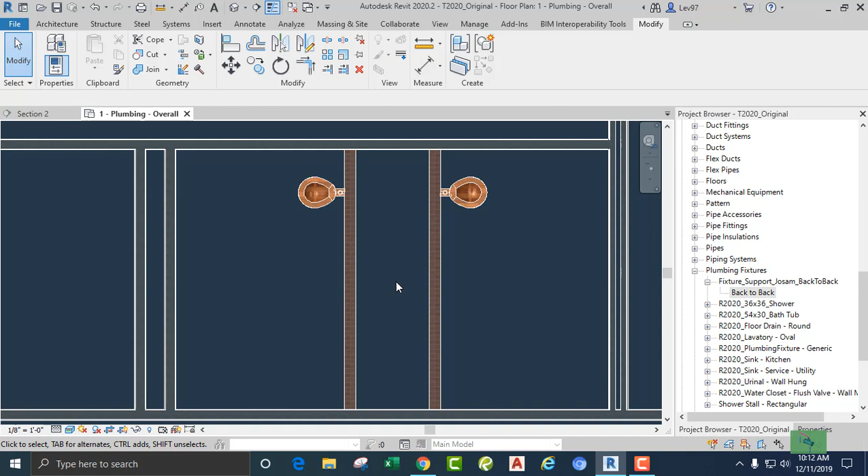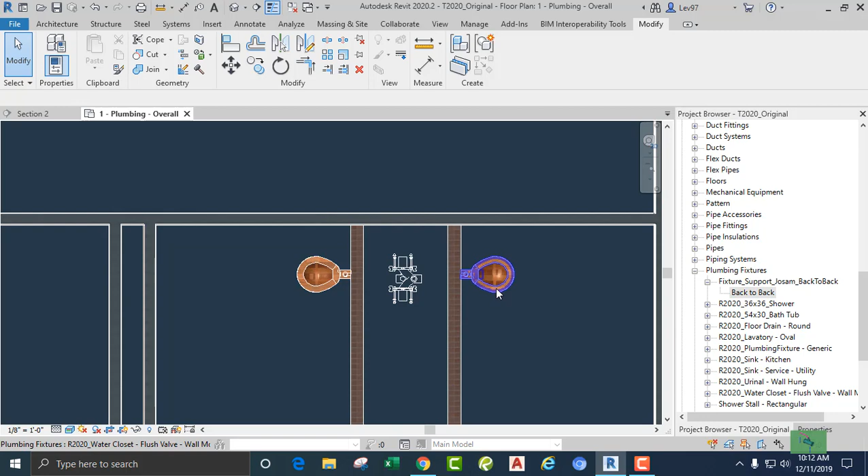Okay, let's talk about water closet carriers. I'm going to drag this water closet carrier over so that I can connect the carrier to these water closets. So I'm going to have a battery of back-to-back water closets.

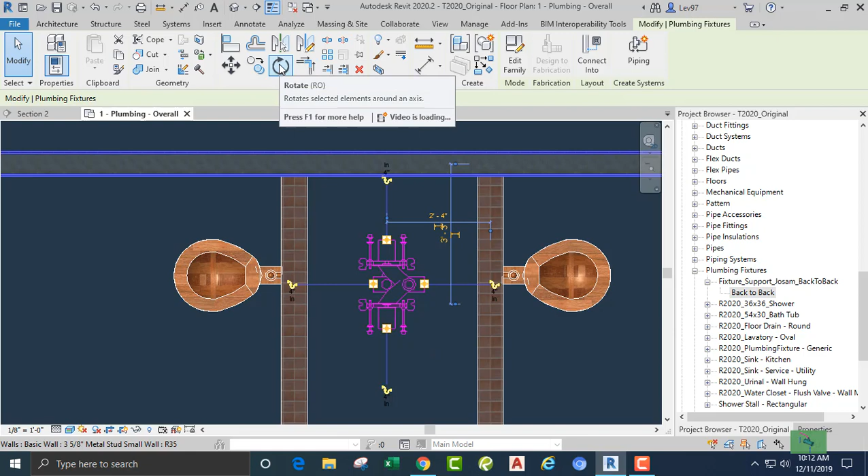After I get one or two in, I'm going to copy these others in. So what it looks like I need to do is rotate this. Okay, let's rotate the carrier clockwise. Let's go here, clockwise 90.

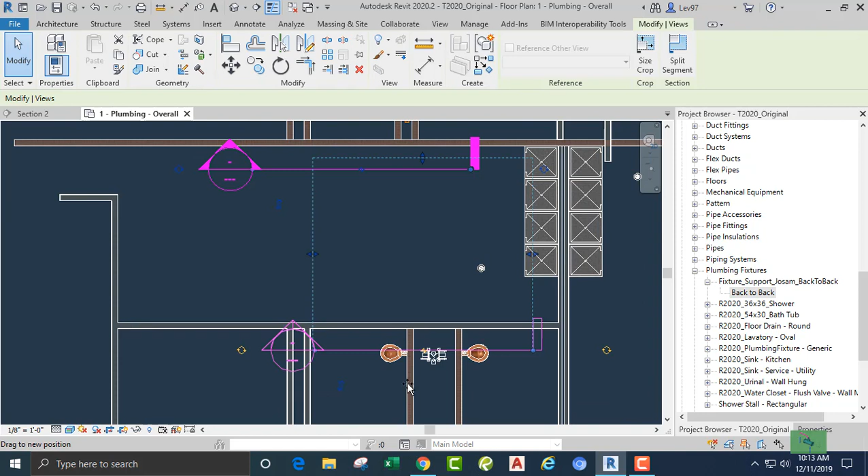Okay, see if we can get a section view in here. Let's put it about right there. Okay, and let's look at our section. Okay, and plan view, let's go back so that we can make our alignments.

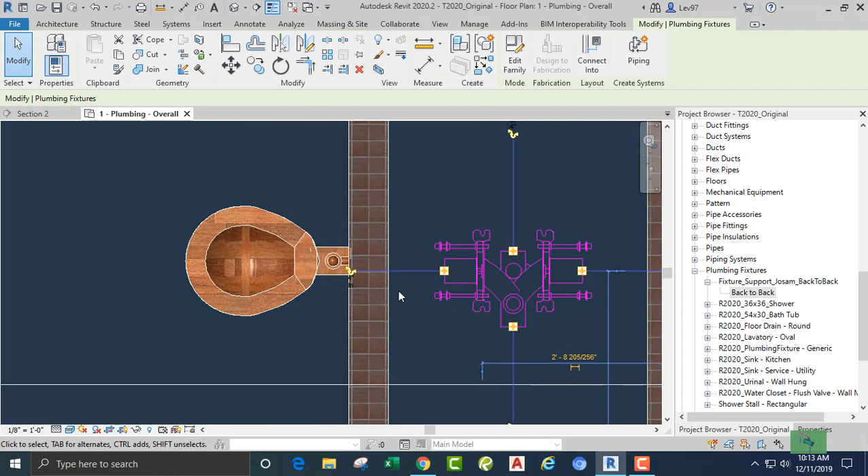I'm going to bring just a little piece out. Is that a 4-inch? Okay, that's a 4-inch. So we come out 4-inch. Okay, and let's try and get this other piece coming out.

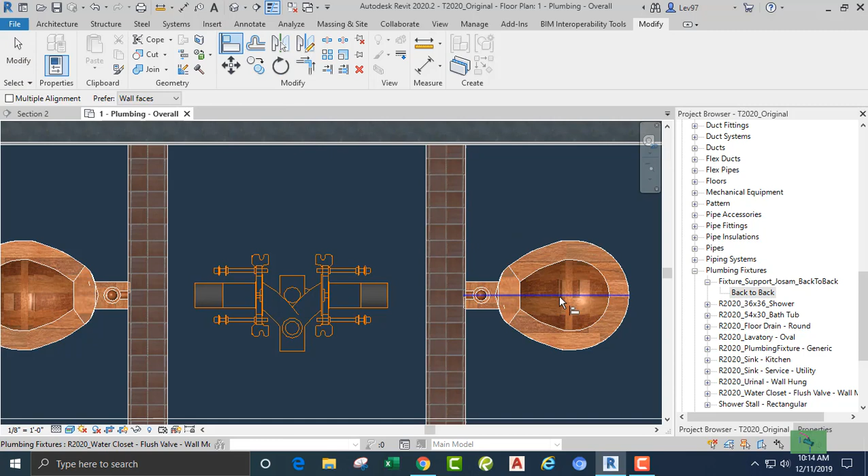Okay, so now I'm going to align. Because these two, it should be aligned. This one and this one, they should be the same. So it should be okay.

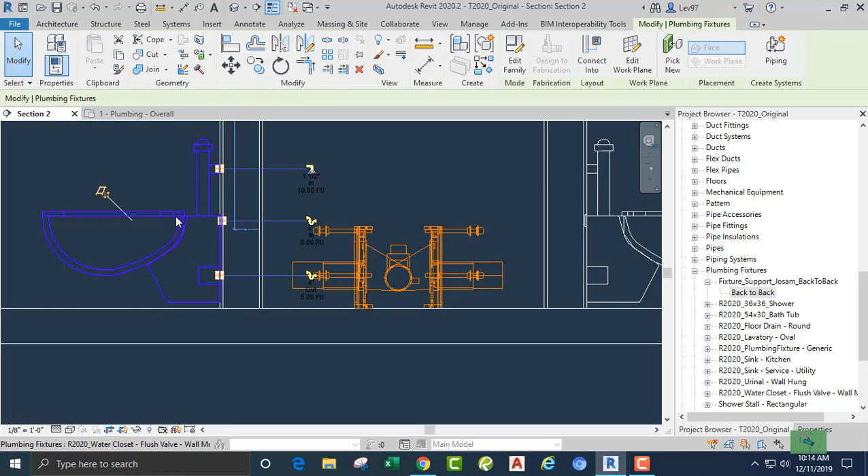Now let's go to the section view and align in the vertical. Let's align here and here. So it looks like it's okay. Where's my... wait a minute.

Okay, and let's bring a little piece out. And here, make sure that the slope is off. Sanitary. Okay, looks good, looks good. Looks like that's aligned. I'm going to put that right there.

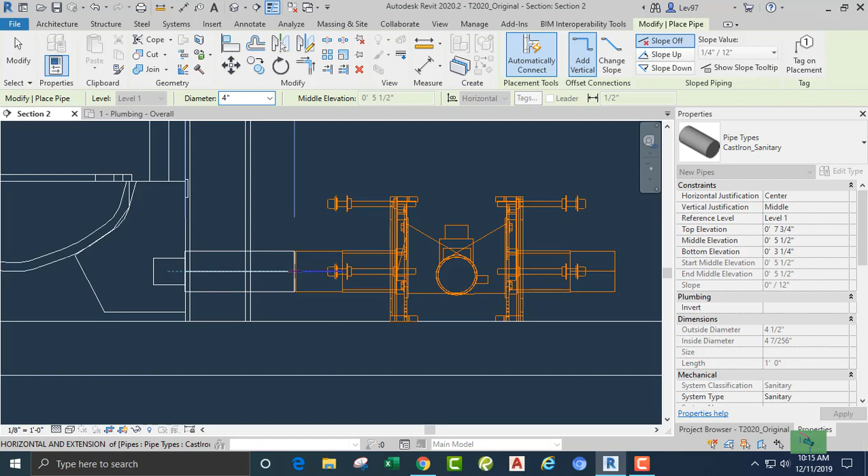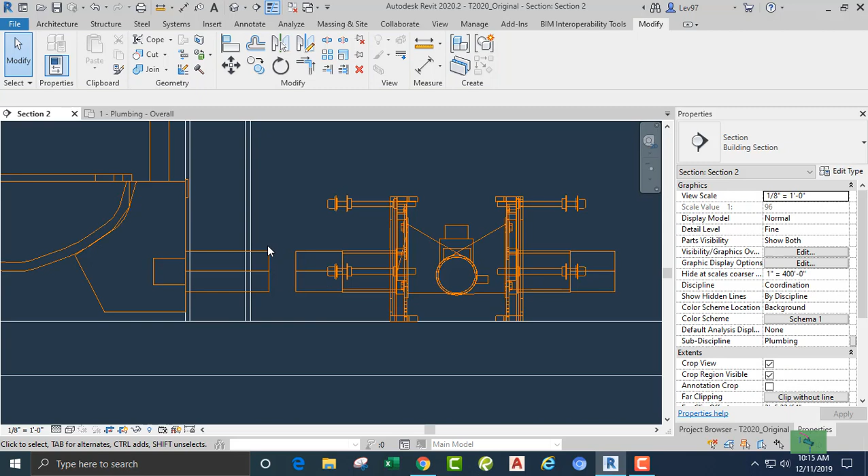Looks good. Do I have fixture units? So 0 fixture units, huh? I'm going to go back, and I think that's what's going to happen. I'm going to lose my fixture units as I go through a water closet carrier. That should be 6 units.

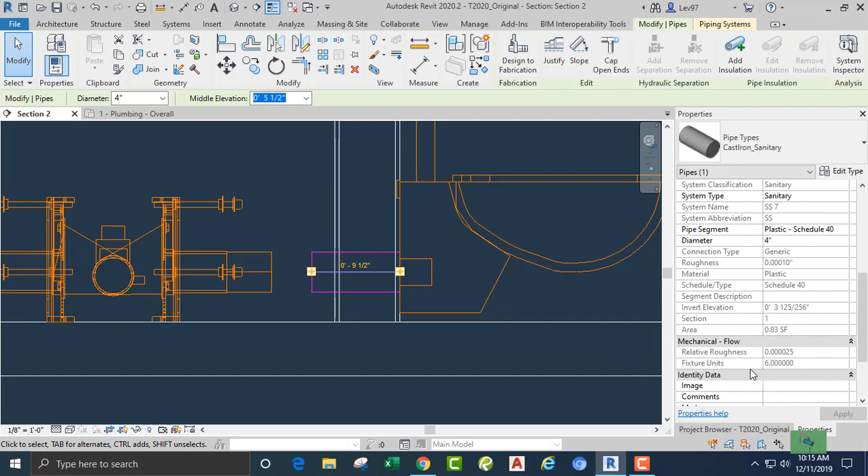Okay, but I think that if I connect into the water closet carrier, I am going to lose my fixture units. So I can see what's going on.

Okay, let's do that, and let's drag that one over. Okay, so I see that I'm going to lose my fixture units.

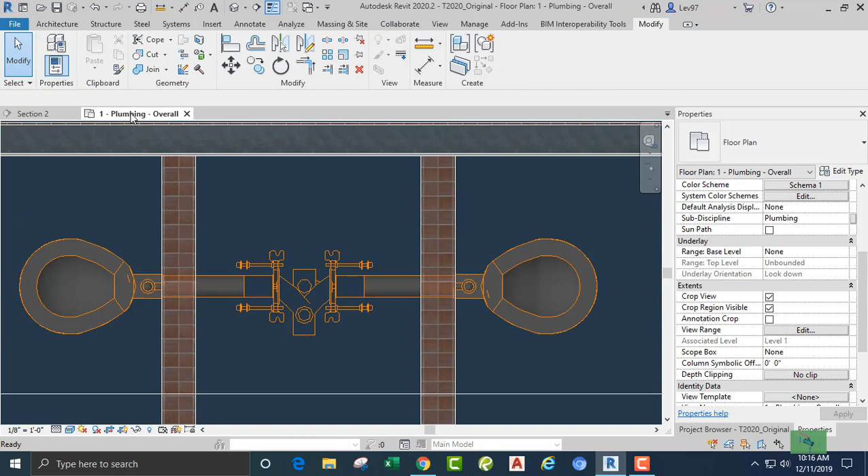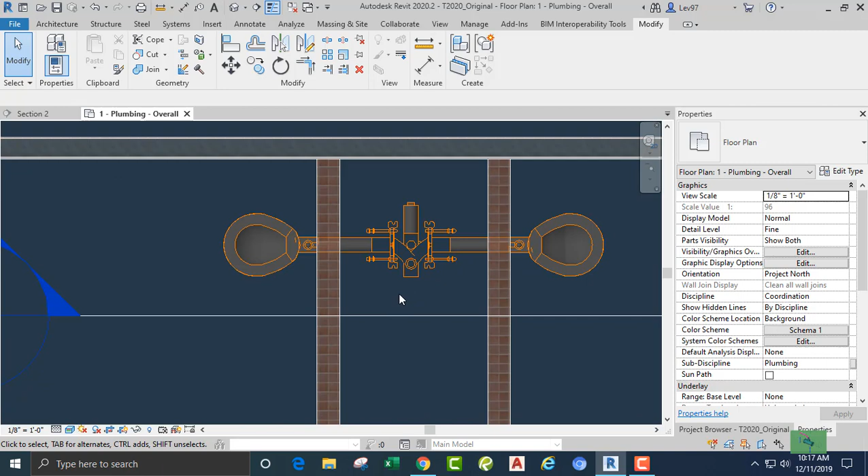Let's bring a piece back and cap it. This is going to be the clean out for, okay, and so, now, so we got that. Now I know I'm going to lose my fixture units. That's going to be 0, right?

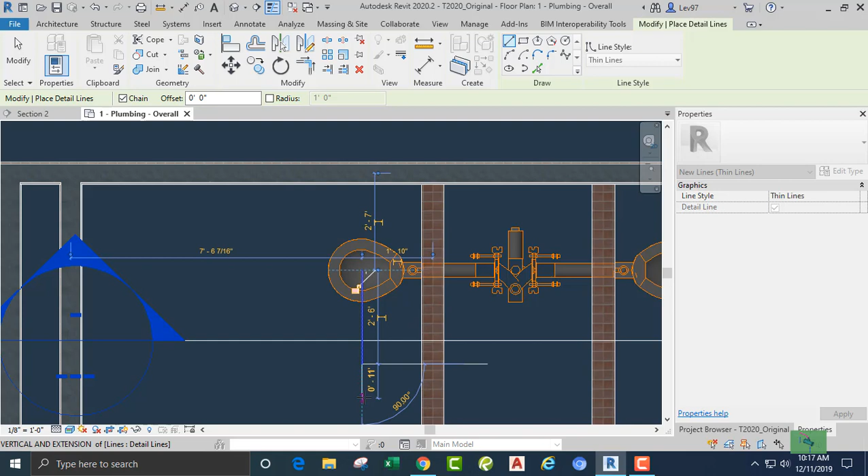Okay, and toilets are usually, let's do 30 inches from the center, and 0, 30. Okay, here, and let's do another 30 to go here. So I'm going to copy multiple.

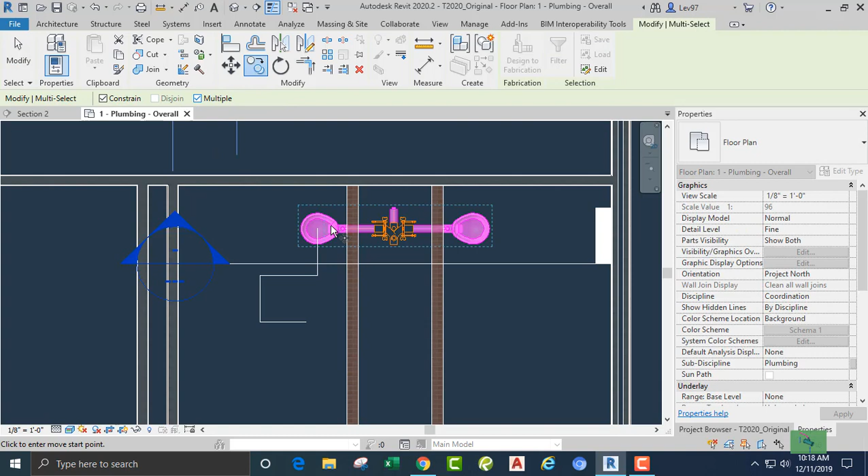Let's just go here. 1, 2. Oh, I didn't get my carrier, huh? Let's try that again. Copy.

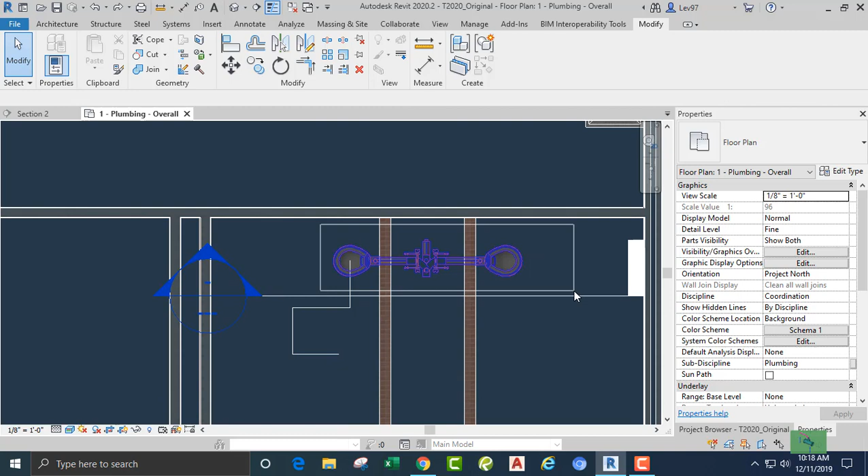Copy. Okay. This one. Okay, and let's line those two up. Can I line from here to there? Nope. Cancel. I'm going to get it just close enough.

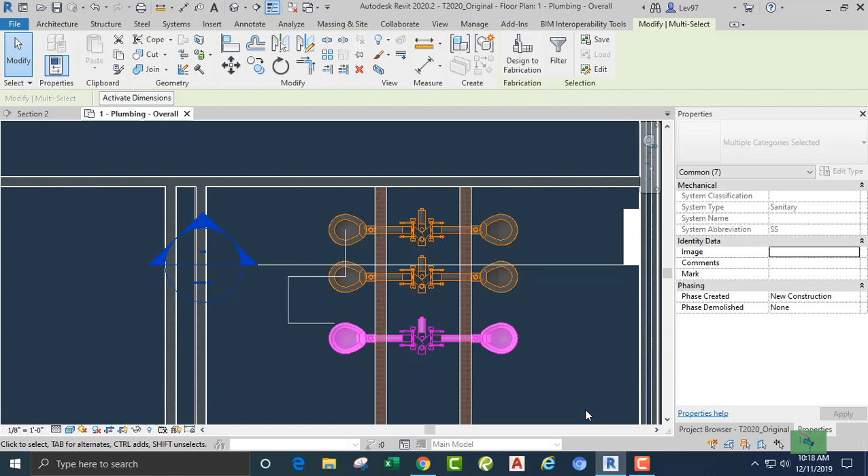And shift. That's close enough. Okay. Shift. Okay, so we are aligned here. Okay. Now that's...

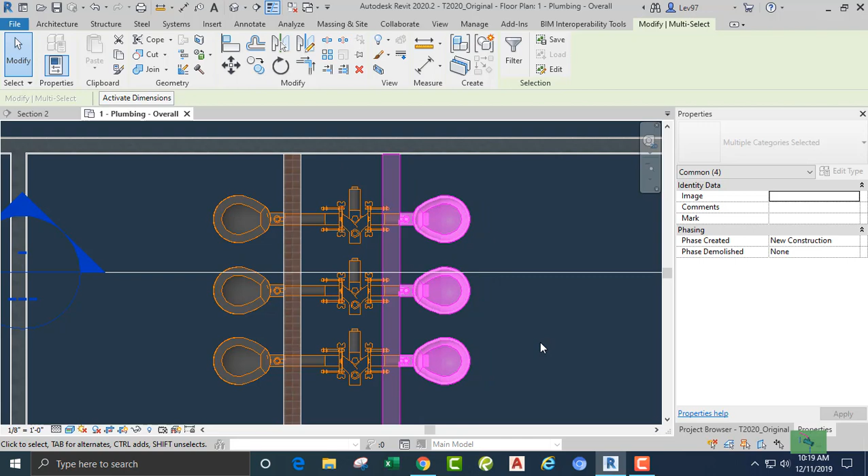So what I need to do is bring the walls in, and here. That looks good. Okay. So we are going to put that there, and...

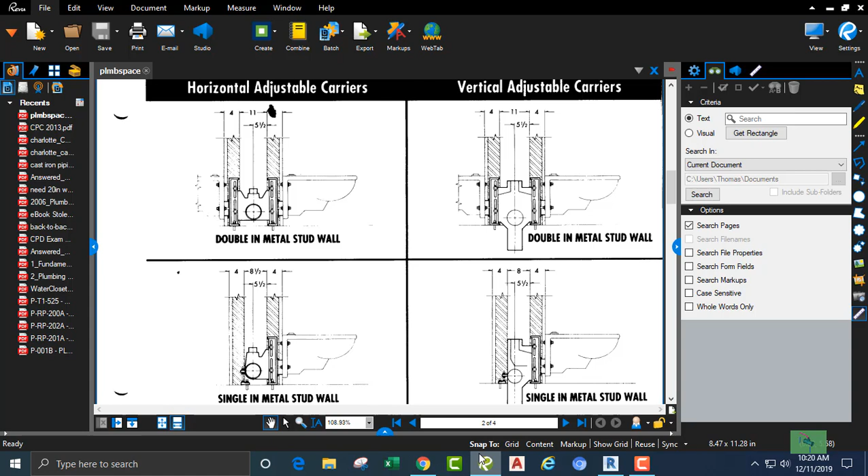So, and let's bring this over. So the spacing for, let's see, spacing for horizontal adjustable carriers is what, 11, looks like about 11 inches. Okay, so we can use that.

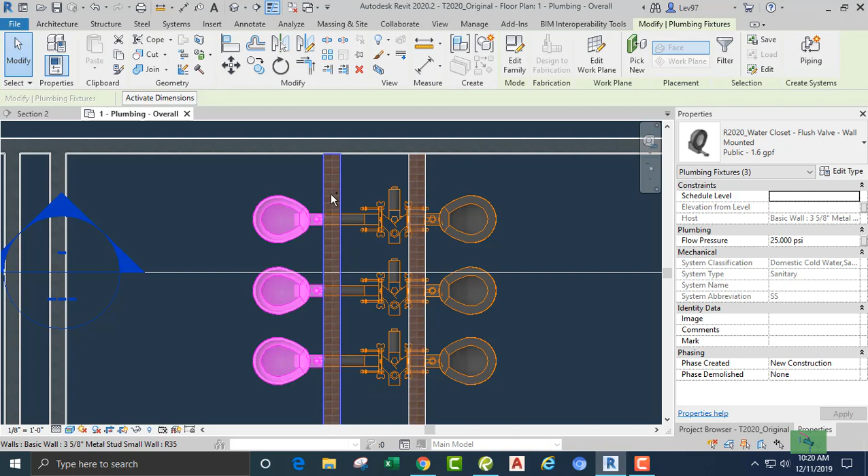Let's go back. Okay, and let's bring in our other fixtures, and let's get my wall, and let's go over. So let's do a detail line, and 11, let's say, right? So we're about right there.

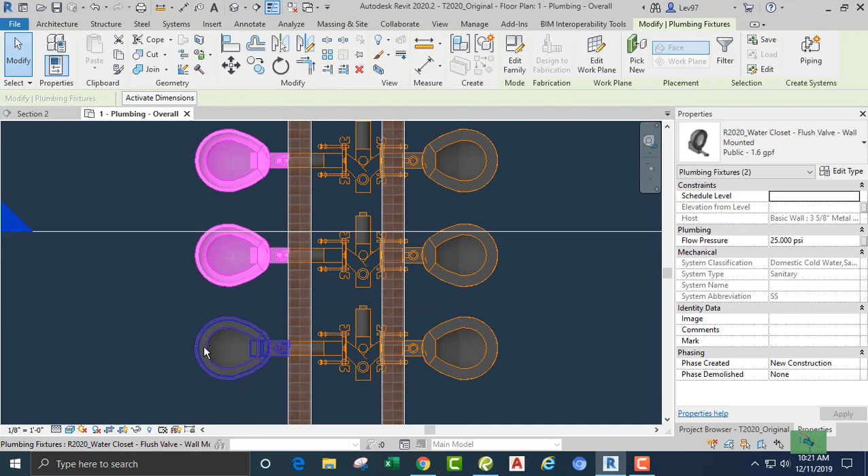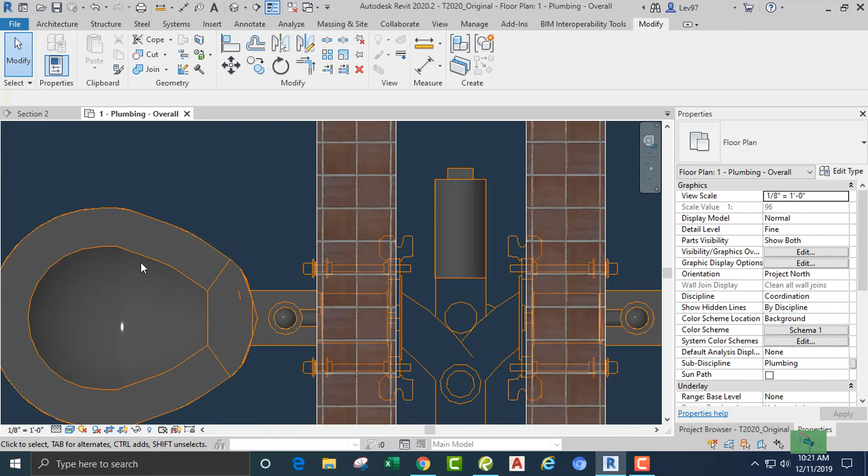Let's see how close our carrier can get. Okay, so it looks good. We're good. Yeah, so that's a pretty good, it's about 11. Let's go back some. Yeah, I like that. Okay, so...

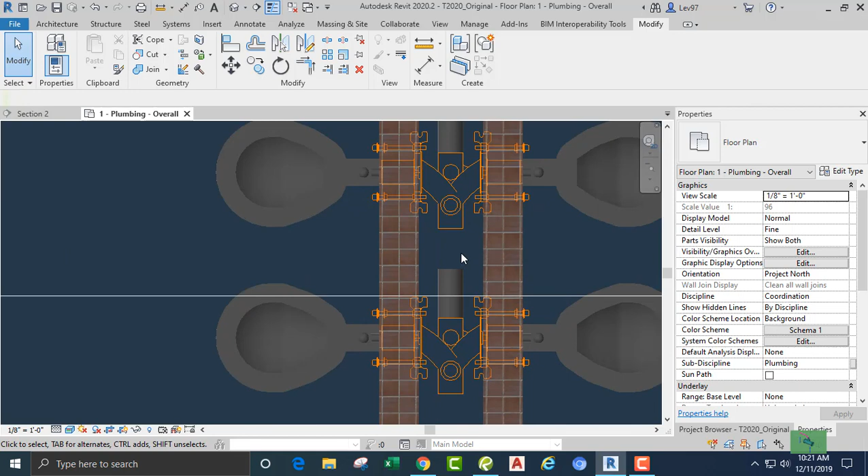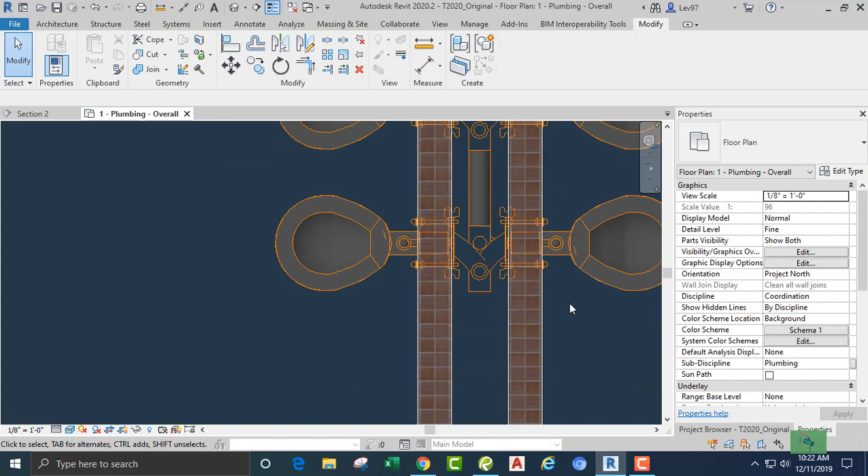As we can see, I'm going to delete this. If I use these carriers when we model, and if I'm using plumbing fixtures, trying to keep account of plumbing fixtures, I cannot use water closet carriers because they are going to cancel out the plumbing fixture count, and I don't want to do that.

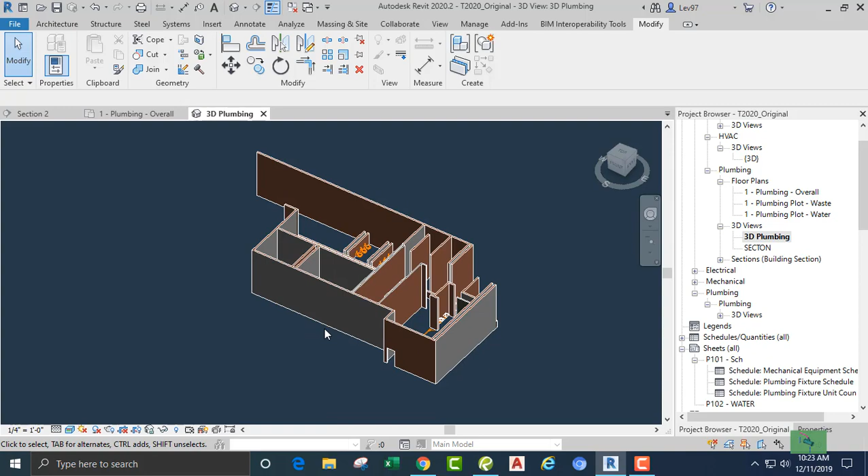So what we have is, let's see, let's just look at this. Okay, looking at a 3D view, let's turn off these walls and look at this guy. So we are here. So this is how it's going to look in the field, right?

I mean, they're going to put water closet carriers on for back-to-back, but if we are using these in our model, then we can't keep track of our fixture units.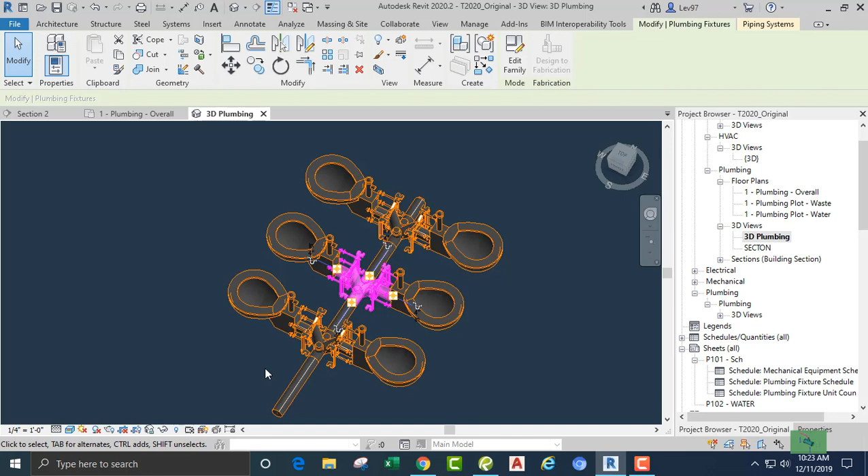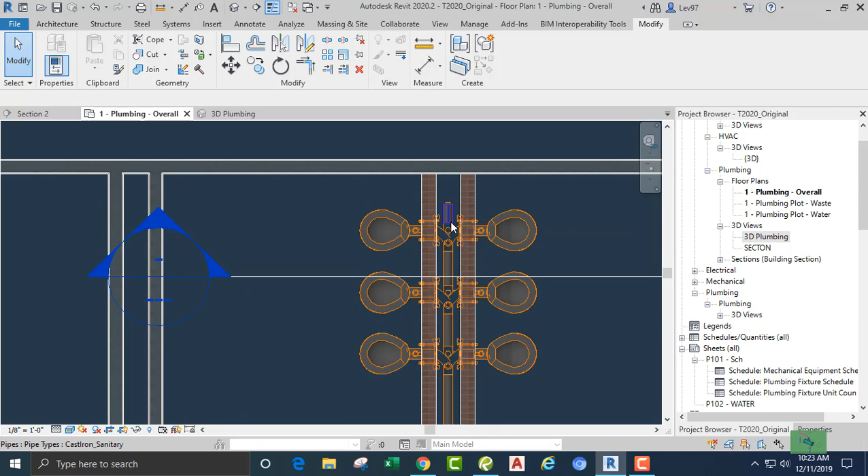So I'm going to go back to our floor plan, and knowing that I'm going to lose my fixture units, I don't want to use carriers because the contractors are going to put those in anyway. But for modeling purposes, let's do this.

And that looks like that's 11. I must have copied that over. Well, I'm going to do this. Let's push this out some. Okay.

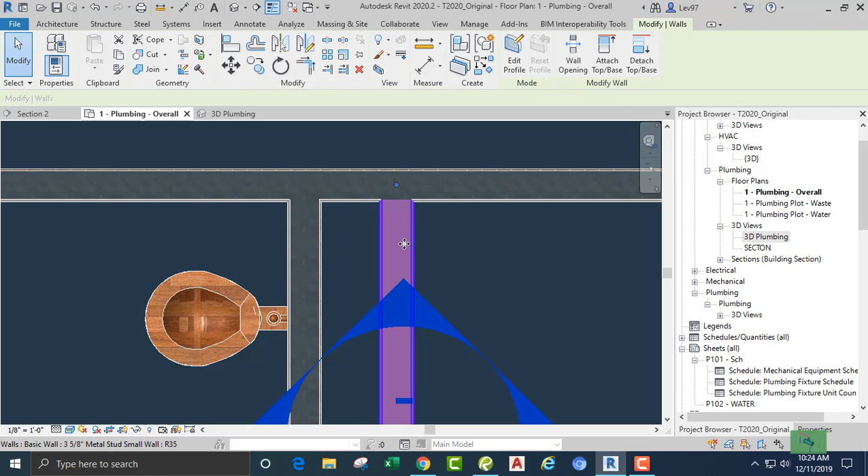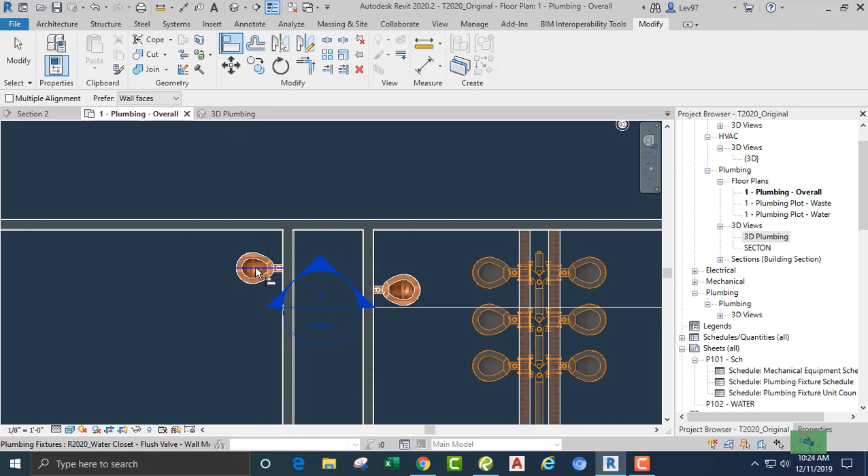And use create similar here. Okay. Delete. And right click. Create similar and put that on a wall. I'm going to align this with that. Okay. And...

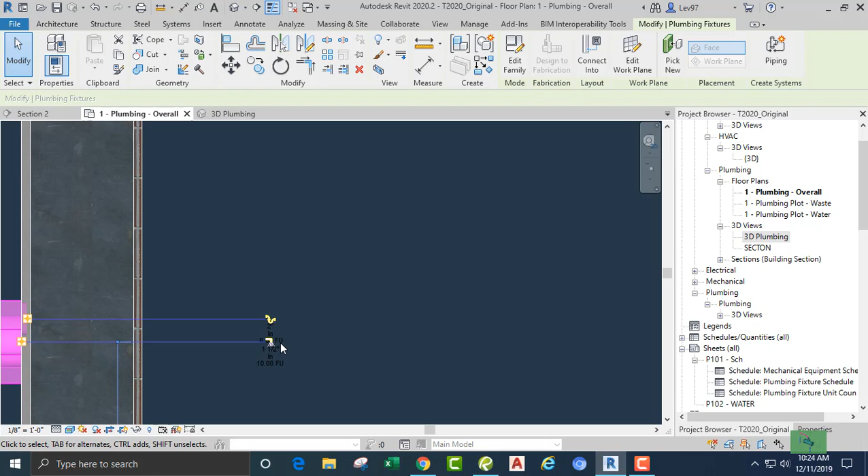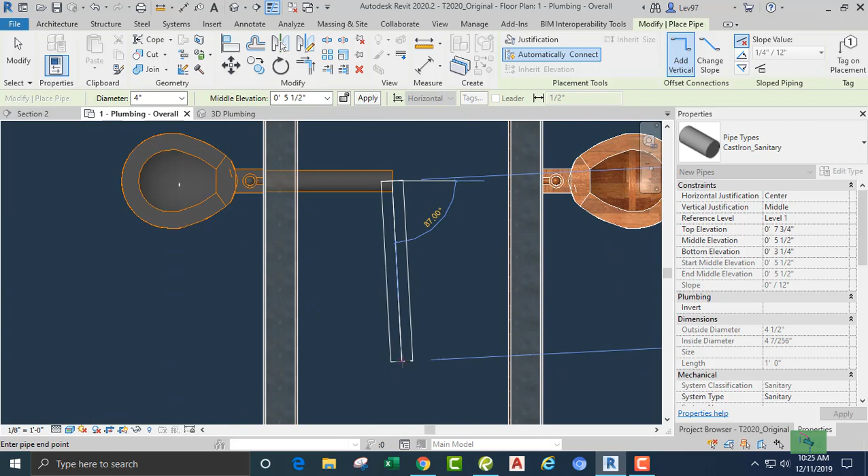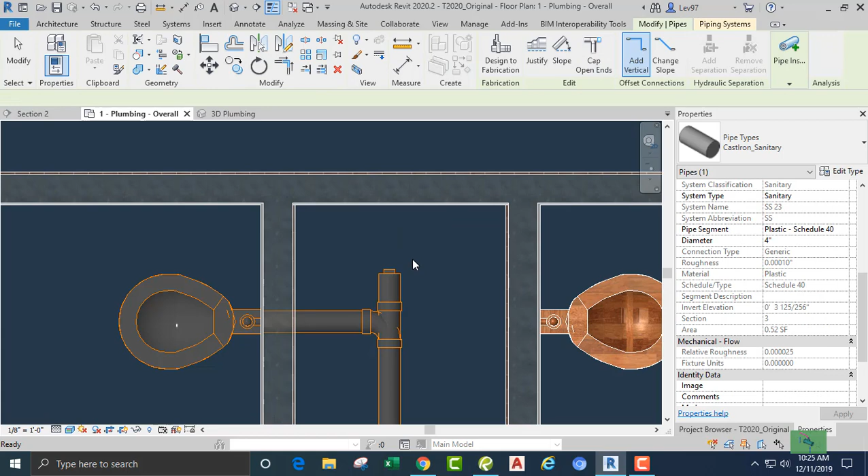Okay, no slope, right? Sanitary, let's go down, make that, and let's see, we should have 6 fixture units, right? Okay, and let's make this. I'm not going to slope because it's not necessary in these tight spaces in terms of Revit. So I'm going to make this, and because it's a line, we are going to connect directly into our fixture.

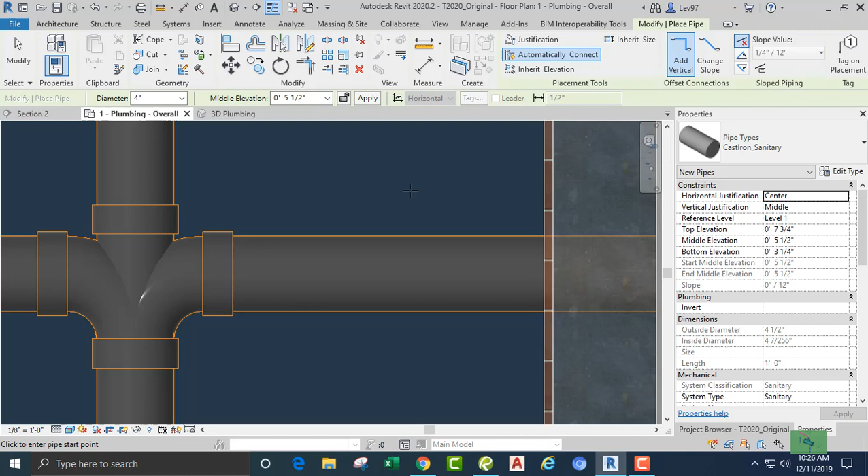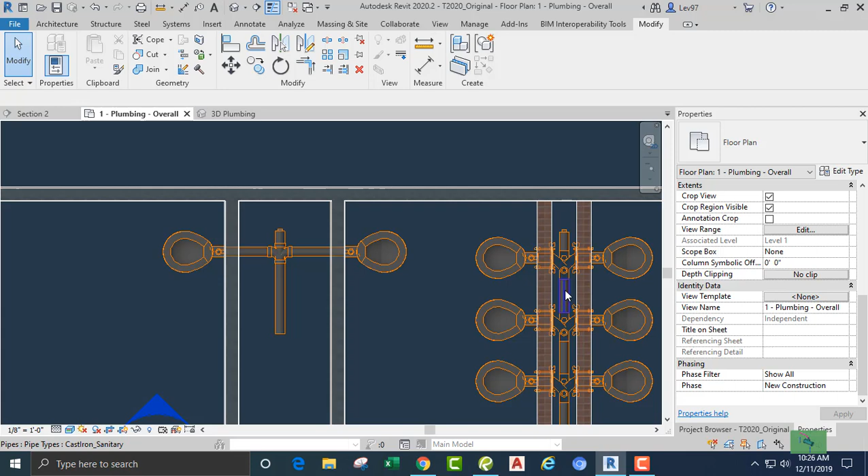Now we should have 12 fixture units here. Okay, so using the water closet carriers, we have to, if we're going to use water closet carriers, then you can't keep track of fixture units. So because this is just a model, I would prefer to use just this. And even here, because it's a horizontal fixture, we usually use a combination here, but there's just no room, right?

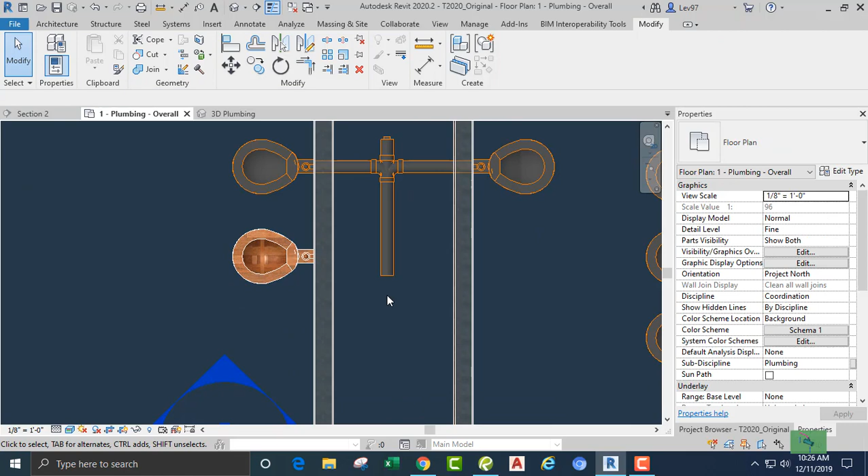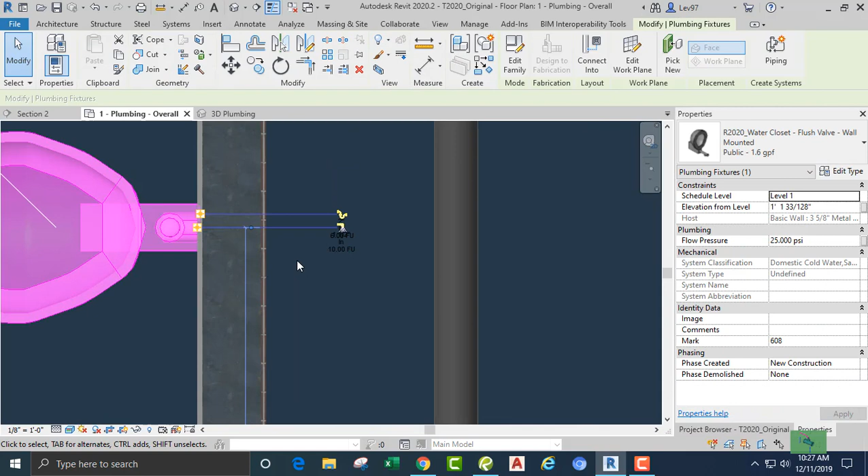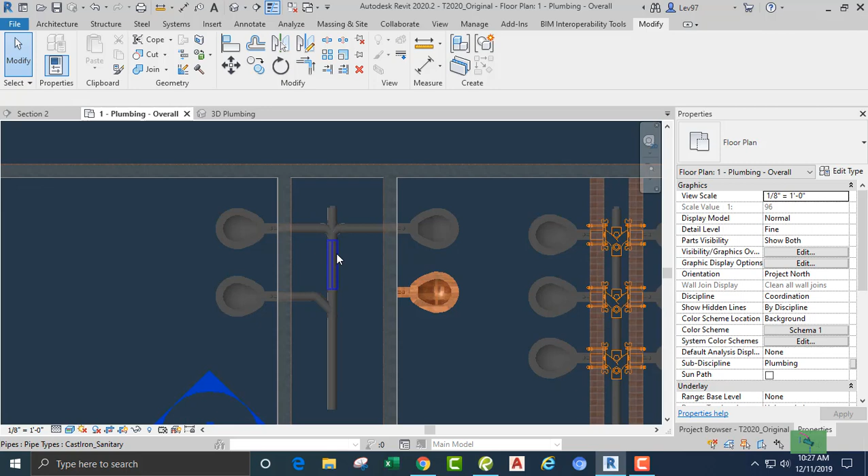I can bring this down. Let's draw this here, draw this here, and let's go back to our properties. Let's edit that type, so it's gonna say here combination. Let's put that combination there, there, and there, so that when we do connect this 4-inch to our pipe, right? But with that combination Y there, I'm not going to be able to connect directly into this main 4-inch pipe like we can if it's being connected in the field, right?

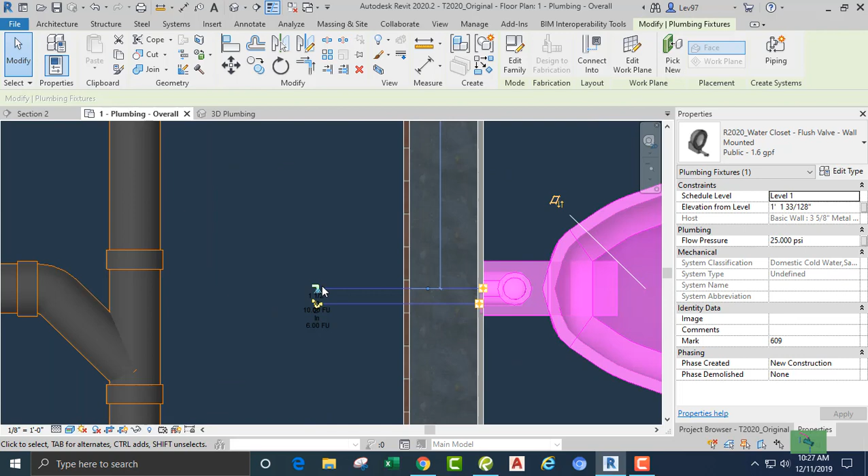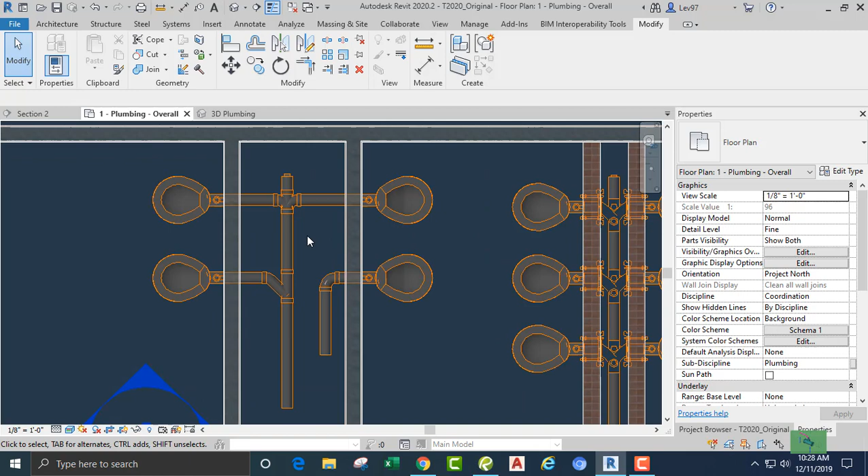So I can align this up, and we can see that it is not going to work. There's no way unless I come out, right? Come out here, connect here, and use a separate line, right? You have to use a separate line, but that's not how they're going to install it in the field. They're going to do it like the layout is on the right. But for modeling purposes, this is cool.

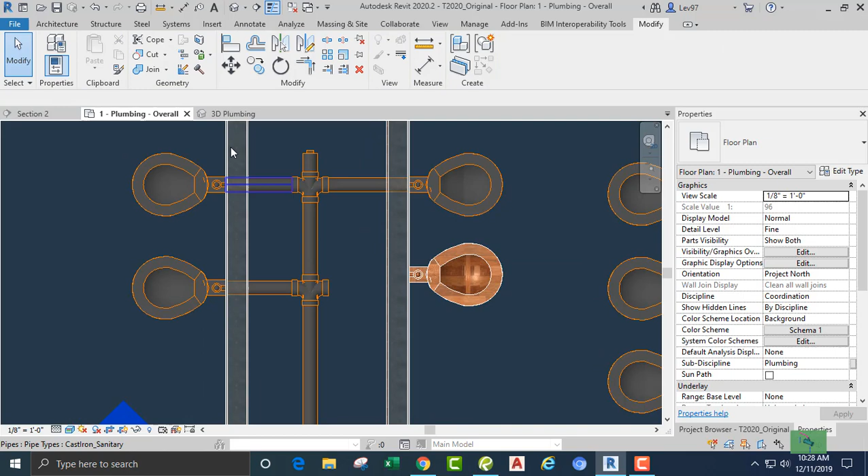I'm going to change this to a reducing sanitary, right? So that we can get our other plumbing fixture. Let's do this, right? Align this guy up again. Okay, all right, come back over. Do the same thing, get our 4-inch. And I can connect that directly up to it. So I should have 24 here.

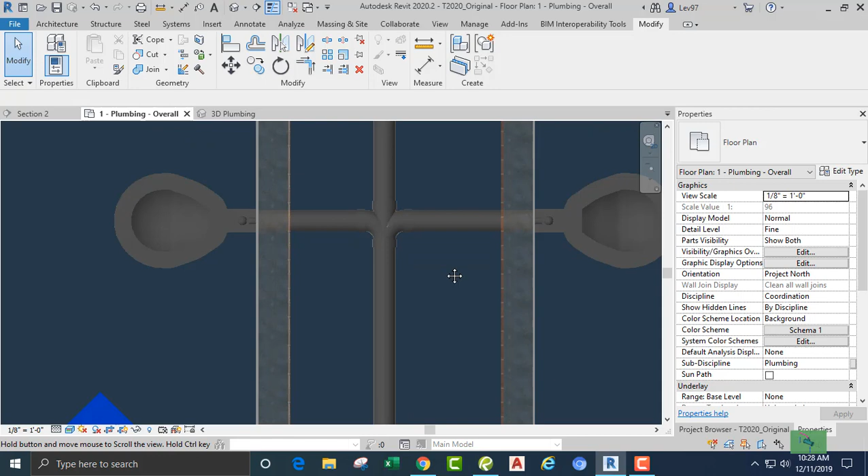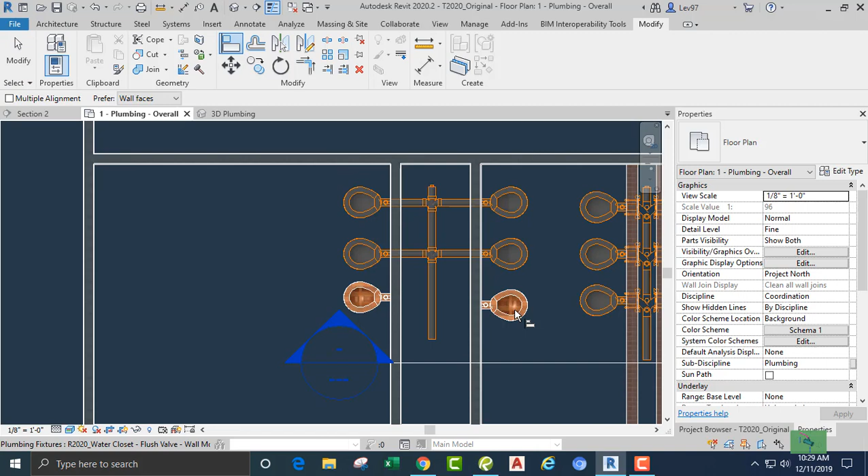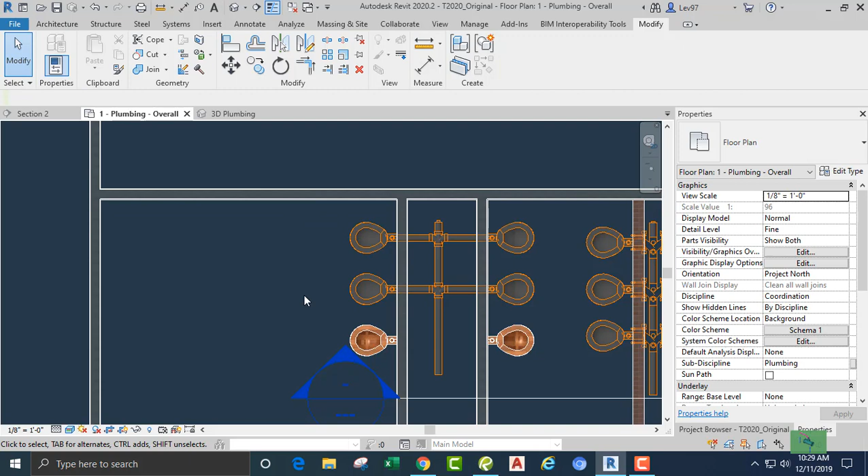Right? And we continue on and on and on as we, I'm going to make another one just so we can be consistent with the layout that's on the right. I'm gonna just bring this down, and we know that the distance, the minimum distance between this fixture and that fixture should be about 30 inches, right? Okay, so I can make that go up and up. Let's do this. Okay, but it should be 30. You know what? I'm not going to be lazy and do this, let's say 0.30, right?

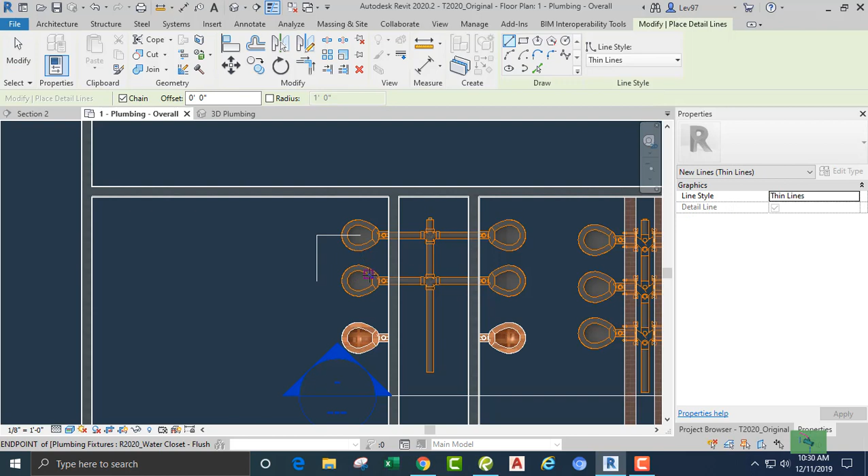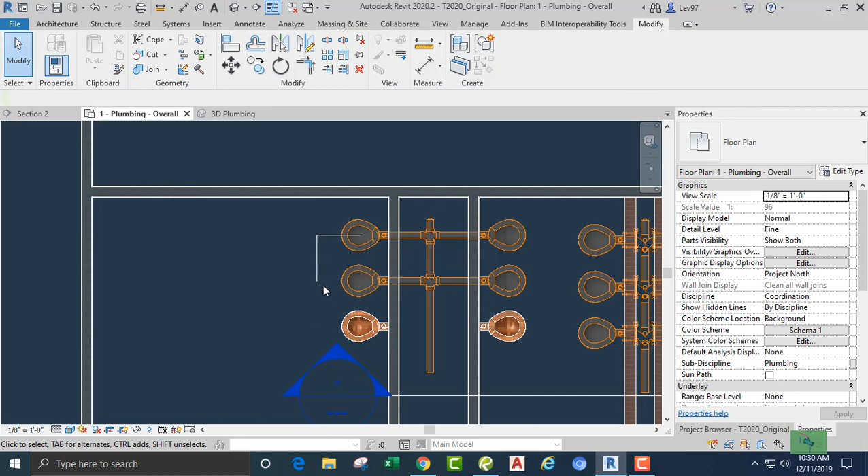It's about right there, we can approximate. It's going to go up to about right there. And another detail line, and we go, say 30, right? And it's about right there. So these two can go up. Okay, and the same thing, easy peasy. Oh, that is my vent.

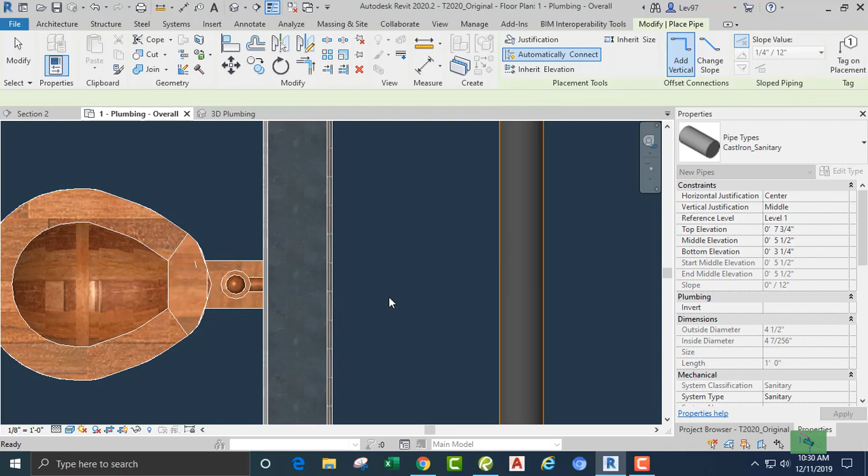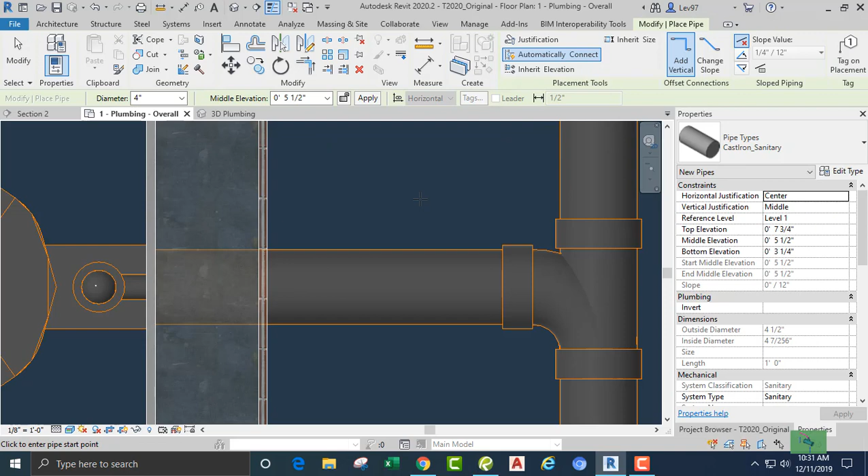And let's go here, here, here, and over. Now see, now here, let's check out our type. It's a Y combination, but I want to change that to a sanitary tee reducing, so that here, here, here, and we go here, right? Let's rotate so that we can get a double. Go here. I'm gonna go from my fixture over so that I don't confuse Revit in any way.

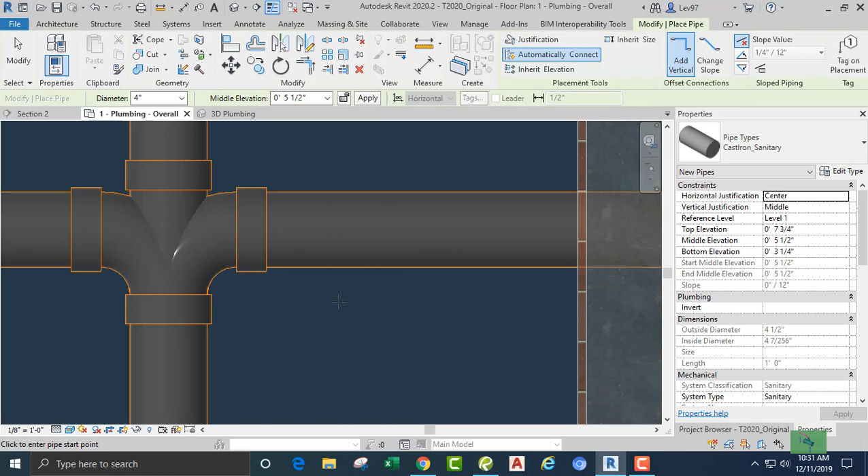So we are here, let's check out. See that we are still in line with our fixtures. Fixture unit is 36, cool, we're good. Okay, and we can, this is going to be 11, right? Let's do, so I'm going to bring that over. We know that that's going to be 11. This side is going to be 11 also.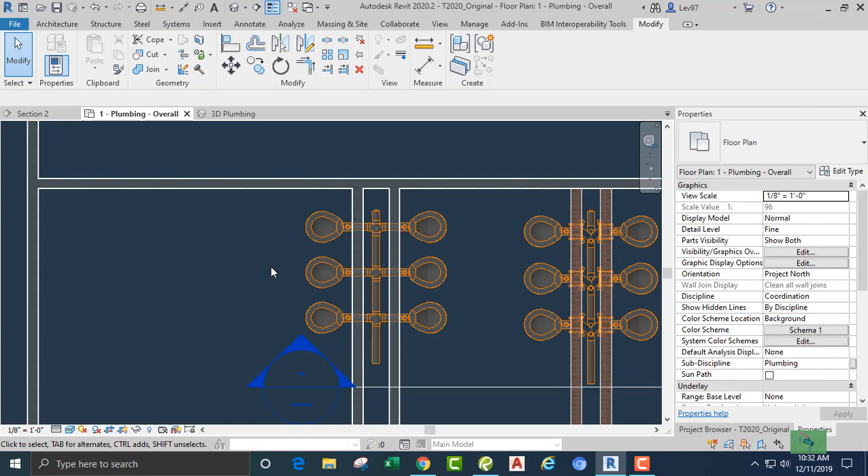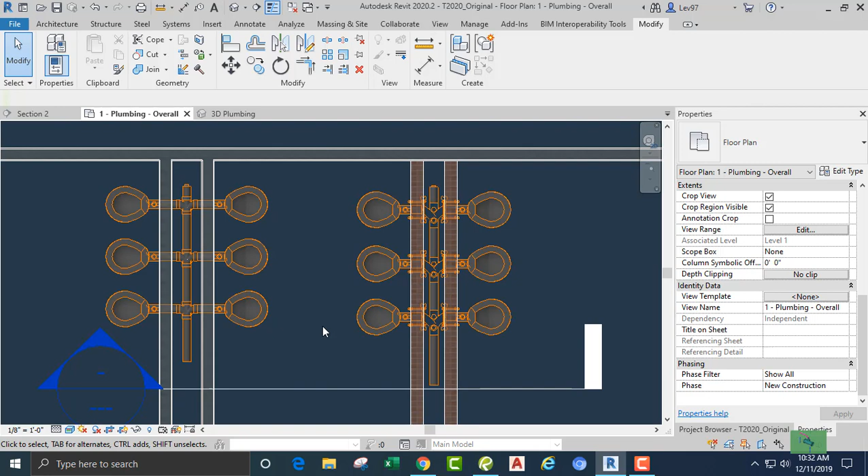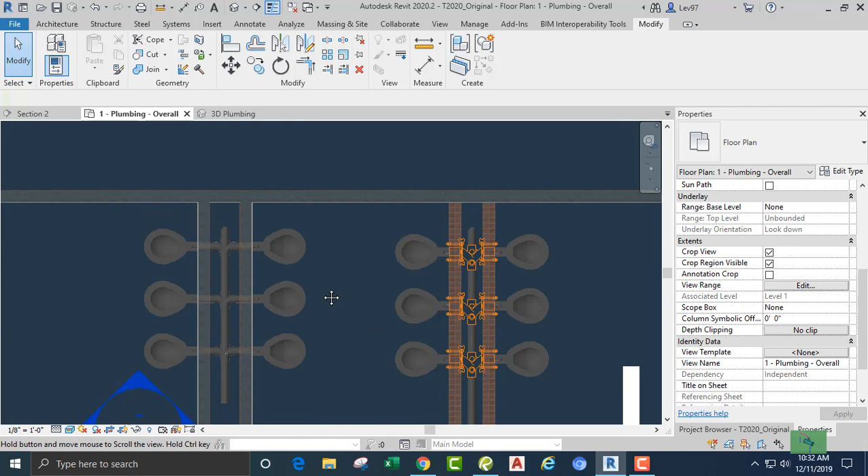So now, because the layout on the left is populating our fixture units, I would model on the left. The right looks like it's constructible, right? I mean, that's how they're gonna install it. But because it's just a model, remember AutoCAD is just graphic, it's just a graphical representation of how it's gonna be. And if you think back in AutoCAD, we never did anything like what it looks like. We were happy with what we had and what AutoCAD gave us, so I don't do a lot of it has to look like this kind of thing.

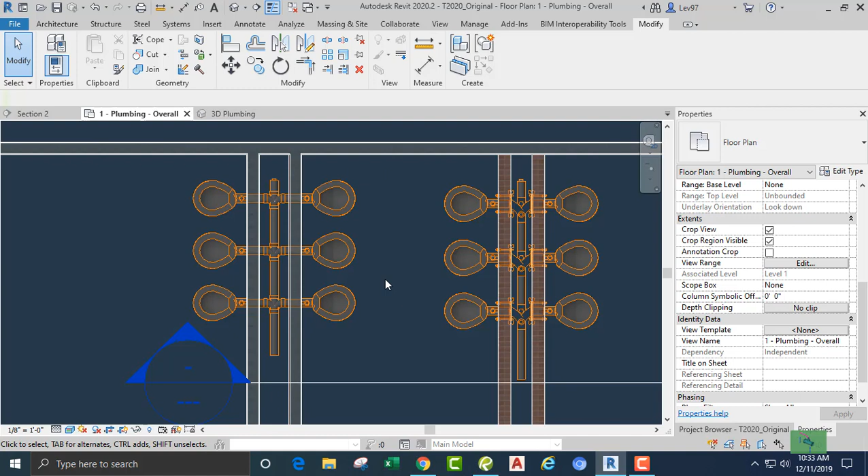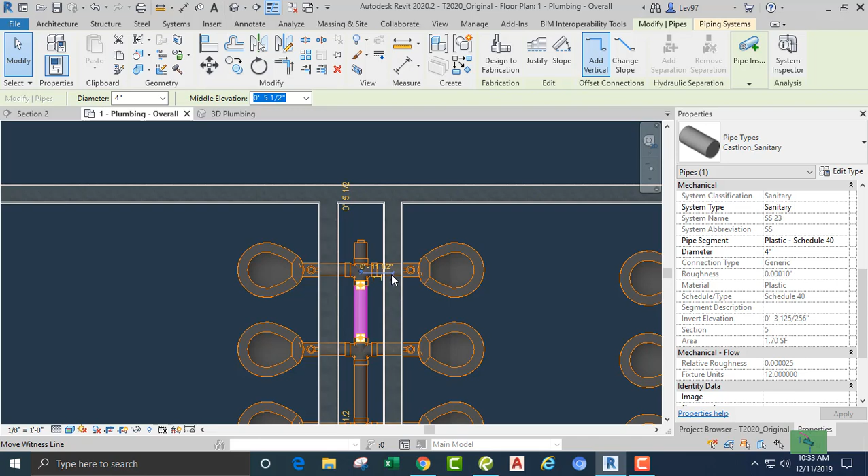My concern is that guy, that 36, that's the one I'm looking for, and not 0. Okay, so that's the difference. I think I'm gonna leave it at that in terms of the water closet carriers and what the difference is, and maybe how to hook these up. It's your choice, I prefer to use fixture units instead of what looks right, if I can help it. You know, I'm glad that this particular fixture units does transfer the fixture units into the pipe, right? Because if it's 6 here, then it should be 12 here if both of these are 6, right? And it continues and continues. I would prefer to model like that. So I hope that helps, and I'll talk to you guys later.